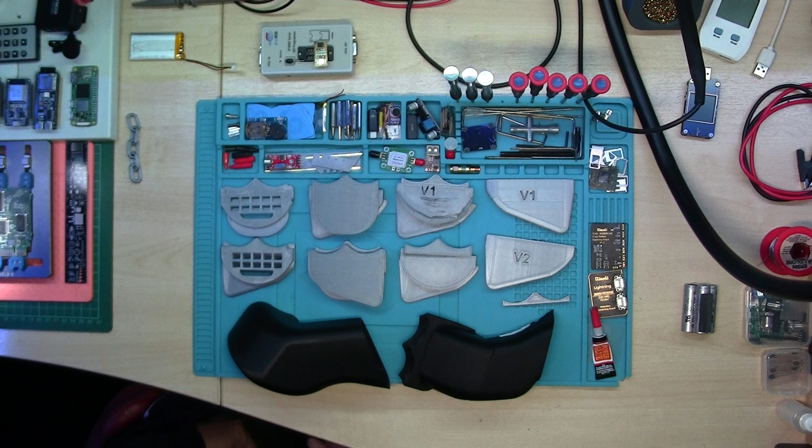Boom! We're back on the ram air ducts. I know, I expected to be finished in this video, but it don't look like it. Countless times I've printed and gone down there, tried it and come back up, and printed and gone down there and come back up. Mate, I should have bought a 3D scanner.

This isn't all of them, this is just a few. I've been no end that's not ended up going the way I wanted to. But yeah, I think you've seen these when I started printing in one of the videos. You may have seen that one, I don't know.

Trying to do a 3D object from pictures is just really, really hard. I watched Adam Savage trying to do guns out of movies and stuff like that, and even though he had reference pictures of the actual thing, it was just way off. So that's my excuse anyway.

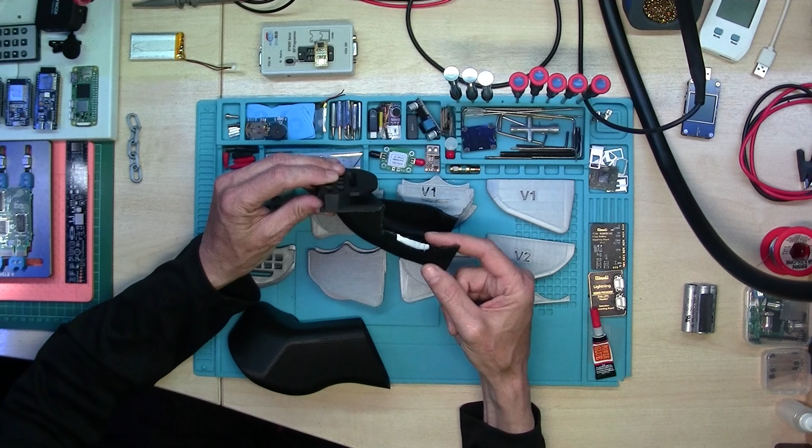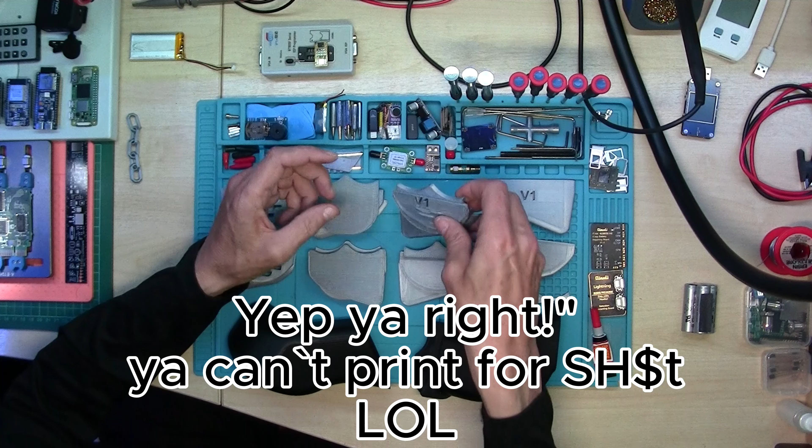I started with these, and then I've done that, done this, done that bit, then done the air duct. I've had to chop it massively to try and get it round where the fork is. Like I say, it looks a mess, an absolute mess. The print is terrible. But it was just to try to make sure that I got the right depth on things and it all locked into place.

Each one has a tweak to it, so whether it's a cut or a corner or it's shifted some way, form or another. If you put them up, there's not really a lot of difference. It's just subtle differences that I've had to do. I think that one fit. That was the first one that fit proper. This just here was off. But that's how it runs when you're trying to do things blind. You keep printing it, checking it, printing it, checking it, and so on.

This is ultimately the one that fits, and I've split it into two just to make it easier to print. And I've channeled it out and put vents in. I don't know if you can see that. If I bring it up, you can see the light come through. If you look at it flat, you can barely see through it. Let's bring it where the light is. Nah, you're not going to see it. But yeah, the light come through.

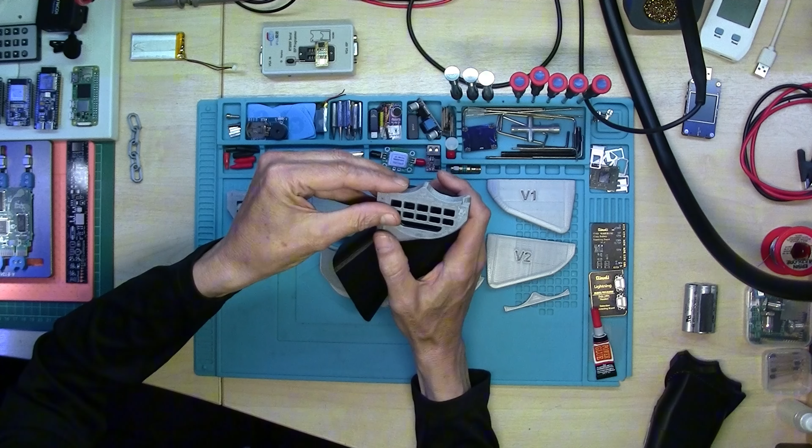If I hold that there and then get a torch, where's a torch? There we go. I don't know if you're going to be able to see this. So you get the gist. It's got the flow through. I'm wondering the amount of volume of air that'll suck in. What you've got to bear in mind as well is the mudguard is contoured like that right next to it. So all the air being forced around the mudguard will get shoved into that intake. So there'll be plenty of air going through there.

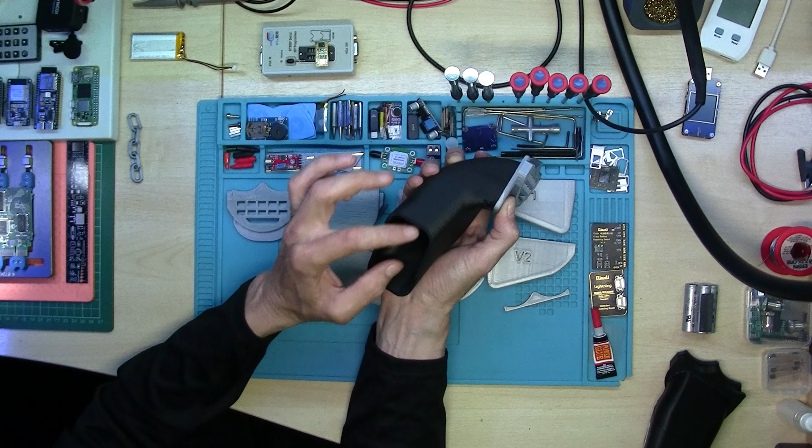And then we've got a big cutout there. There's no restriction in that pipe now. The only restriction that I think I've got is this. So I'm wondering, do I cut it all out the same as this?

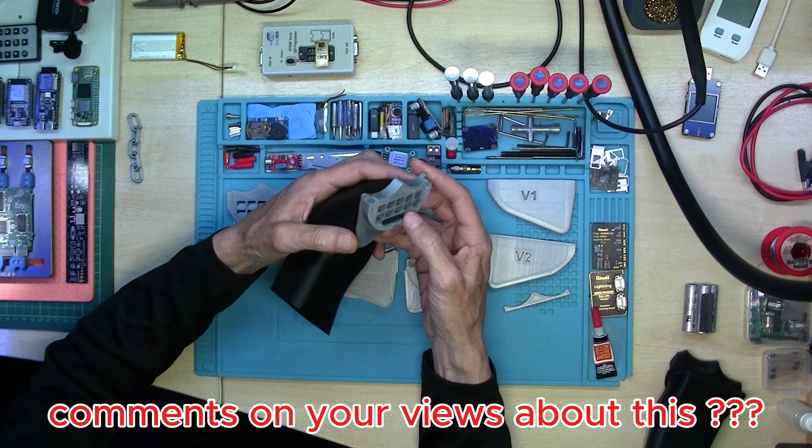But if I do that, air's just going to blow that way. You know what I mean? So air will come in the intake there and get forced around that bend and then just blow that way. Well, if it blows that way, it's just being blown into the centre of the wheel.

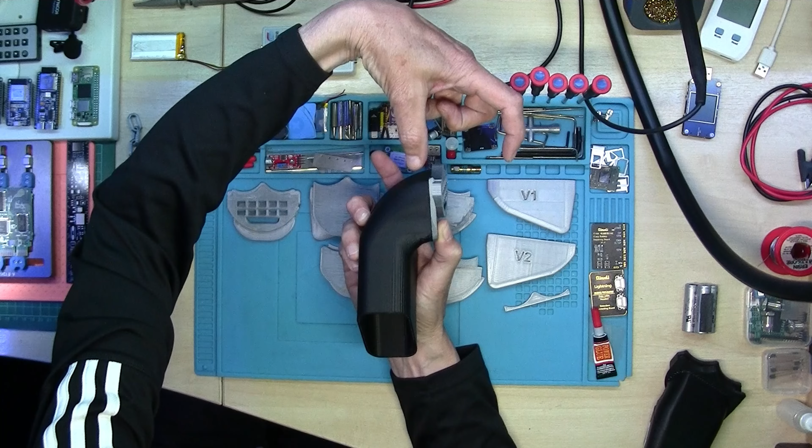I mean, the caliper's up here. You know what I mean? That's why I've channeled them air ducts inside this part to point up. I mean, the air will get pointing that way. You know what I mean? I mean, like I say, I'm just guessing. I ain't got a clue. You know what I mean? But yeah,

4 hours to print that. 4 hours. Jesus Christ. 4 hours. Yeah. But yeah, like I say, the front's changed angle.

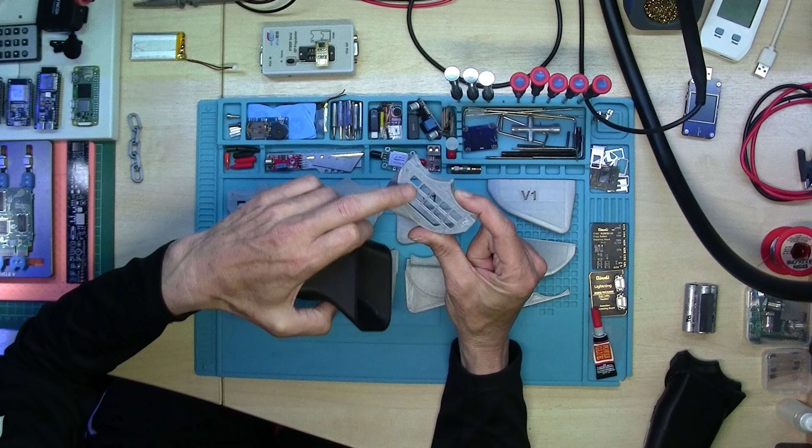And I've got a little trim that goes round the front that I was thinking to put some crosshatch things in to stop stones and whatnot. I mean, the stones ain't going to get by it with this. You know what I mean? But if I delete that and cut it out, then it's straight through. It's like a straight run. You know what I mean? So, I don't know. I mean, I'm guessing.

Yeah, so that's where we're up to. You know what I mean? I mean, that didn't print bad, I'd say. You know what I mean? And I printed it all in one, upright like that. Yeah, so all the overhang, I mean, there was a little bit of an issue just here. You know what I mean?

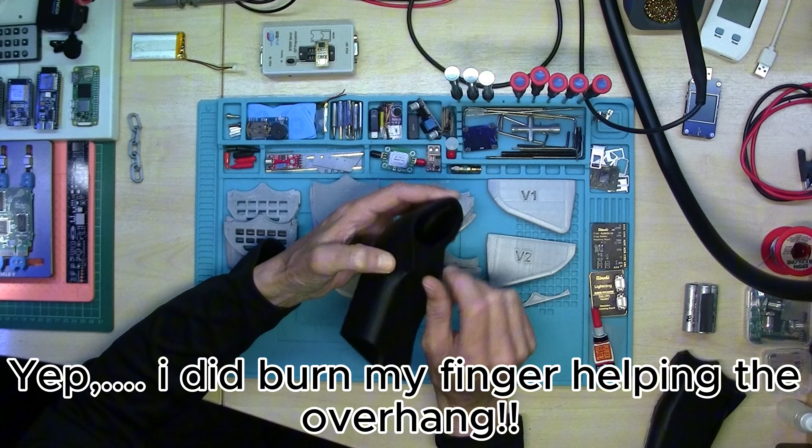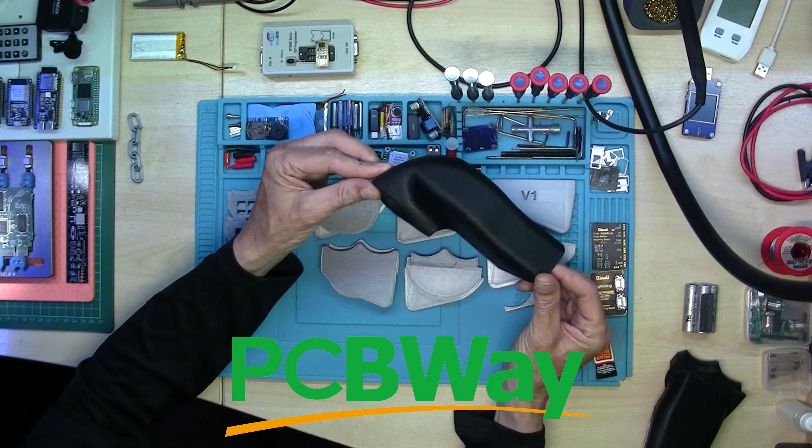But I mean, if I give the files away to whoever, my advice would probably be to get it printed professionally. You know what I mean? I mean, you can print it yourself. If you're happy with the finish of it, then yeah, it's not an issue.

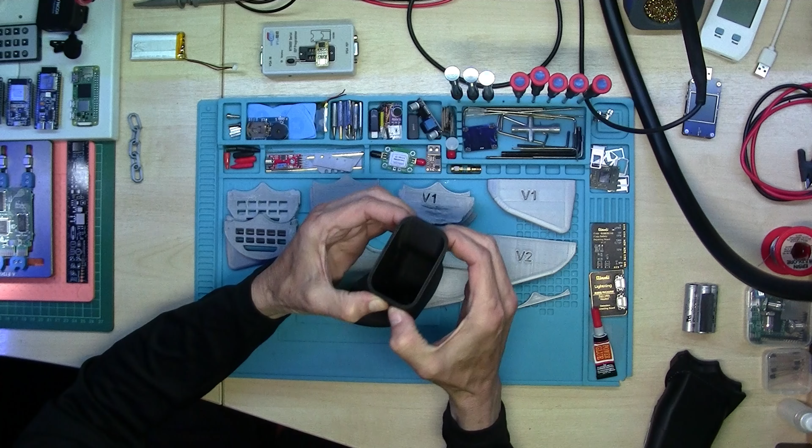One thing I would say is I'd print it with 100% infill as well. I ain't done it on this one because it's just a test piece, but if you look, that is proper flexible. You know what I mean? The top's solid, but the sides, yeah, proper flexible.

So I mean, a good smack will pull on that, and I reckon it'll break apart. I mean, it's only PLA as well. You might be better printing this in ABS. So,

and I think you're gonna have issues when it's all together and it's all one solid object or body. I think you're gonna have issues trying to print it because the amount of support you're gonna need is gonna be phenomenal. See, I'd print it like that, but like I say, you're gonna need to add support unless you split it in two or something like that.

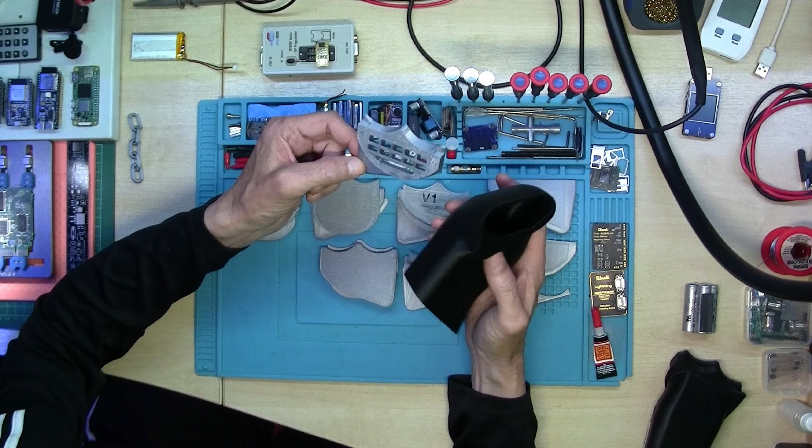Or I could always distribute the files in parts and then you glue it all together. You know what I mean? There's that option.

Yeah. I'm going to make quite a few different versions of this. So there's going to be some that's got the GoPro and Insta360 mounts. There'll be a number of different versions for different riding. And any that you want tailored to you, I can do. So yeah. But let's jump over to the computer and let's have a look at some of the pictures.

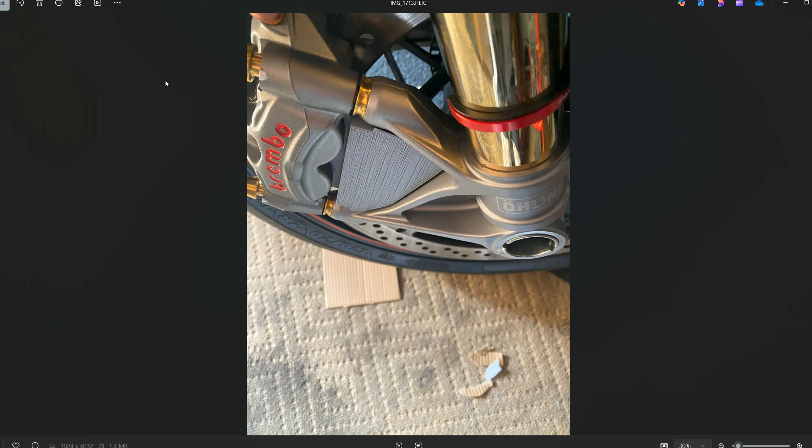Right, so here we are on the computer. I've took not a hell of a lot, but a few pictures of how I was getting on when I was going down there and trying them. So these are the earlier versions of it. Managed to get it to fit in that groove on the M50s. So it locks in there, and then you've got a flange either side, front and back of this Öhlins fork. So like I say, that plate is not going nowhere.

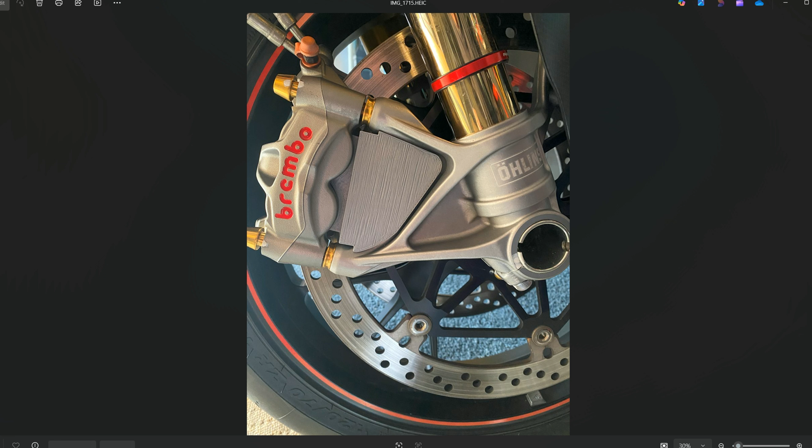What else we got? The thing that you don't get from pictures is from what I've printed to the top of that bit there on that fork, you have to go down and measure it, and then this side is practically nothing. Then you've got the radius of that bit of the fork there, and then you've got a miss there, because if anyone's got crash bobbins on the front forks, you want your duct to go over that so they can still fit the crash bobbins.

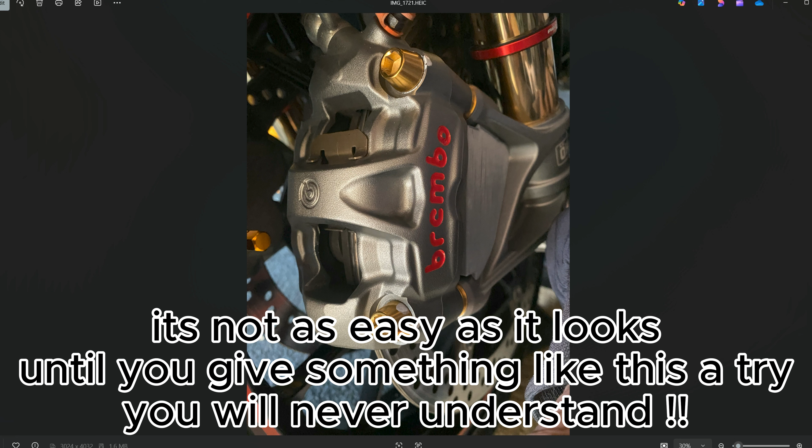Yeah, there's quite a few things that you've got to think about. But you see, look there. It's probably 3 or 4 mil there, whereas there it's probably 15, 20 mil. And it's really, really hard with pictures. Like I say, if you get a 3D scanner, you could probably do this in half the time I've done it in. You know what I mean?

But yeah, there's the vents. And then on the other side, as the air goes in there, it gets rammed up towards the pads and the discs. You know what I mean? I think this bottom row and that really long one at the bottom will blow it past the disc onto the other side. So it's kind of cooling both sides of the caliper, if you like.

Yeah, a bit closer view. Like I say, don't pay attention to the prints, they're just roughed out quick as hell. What else we got? Oh, that was the poor attempt at the first duct. Like I say, I just chopped out quite a bit. Well, chopped out this corner bit here because I knew it wouldn't fit, and then went down, and then the fork didn't fit there, so I had to chop that out. I mean, you can see where I've hacked it out.

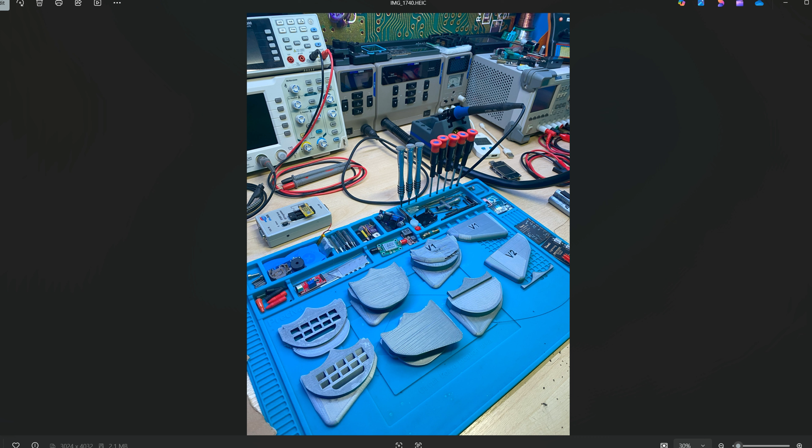And a load of pictures of the different versions I've printed out, or some of them. Now that's it on the bike. Which fit quite well. I mean, no issues. Like I say, I had to chop along that bottom there and along the top here where that radius is. And it's really, really low there. So you ain't going to get a crash bobbin on your front fork. So I had to redesign it.

But yeah, you can see where I've hacked it away with some snips. Made a right mess. But it was just to give me the depth so I could calculate how far off I needed to be. And same with the bottom. Bottom one's not as bad. But like I say, that's way too close for any crash bobbins. So I just scrapped this version, redid it, just went into Fusion and mocked up another couple, and then just picked the one I liked.

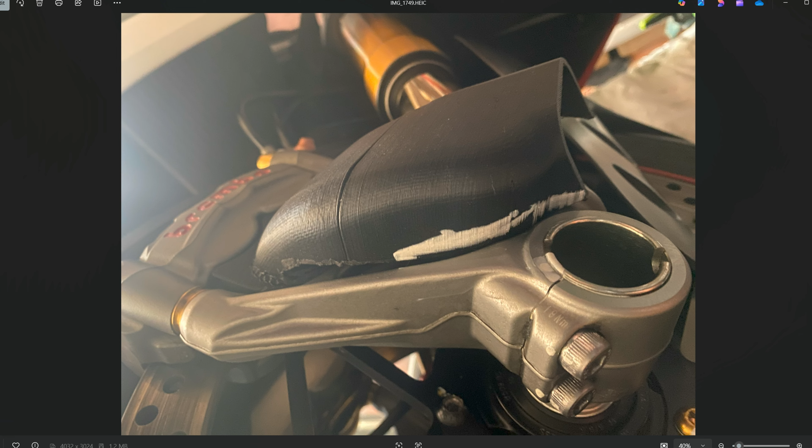Yeah, I mean, once that air duct there is joined to that plate, what I'll do is I'll bevel all that so it all blends in. But yeah, I mean, getting there. What else we got?

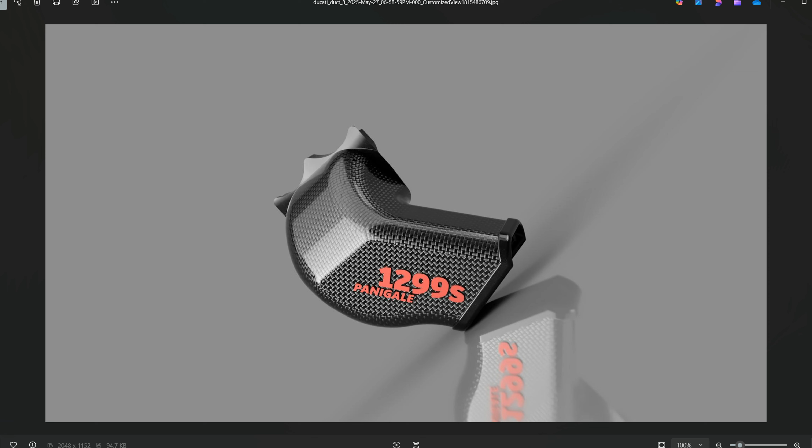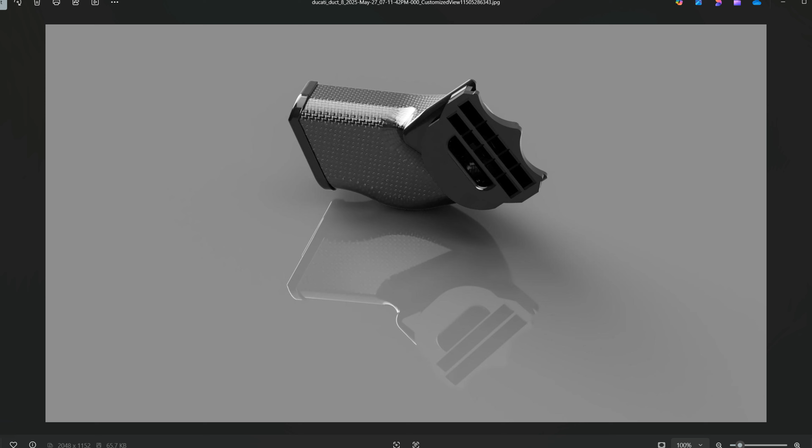This is where I'm up to now. So this is the revised duct that I've done. Now it misses the bit where the, let's see if we can get a better picture. Yeah, it misses the bit where the crash bobbins go. I'm not sure about this front. I might re-edit that, I don't know. But yeah, it's looking good. Like I say, I've only printed it tonight, so tomorrow, when I get time, I'll go down there and try it. See if it clears the forks and all the obstacles on the inside.

But yeah, there's the GoPro one. So I'll probably do a version with a GoPro mount on the top, and then a version with a GoPro mount on the side. Sorry, you know what I mean. And there'll be quite a few different versions. So whether you want the GoPro mounts or not, you'll still be able to print off whichever version you want.

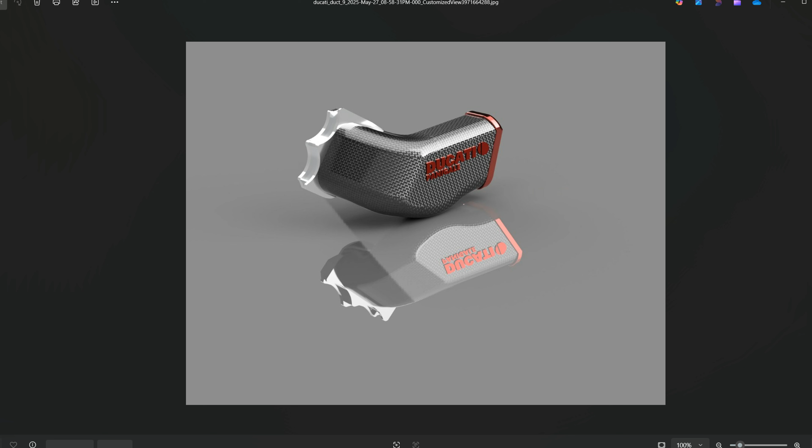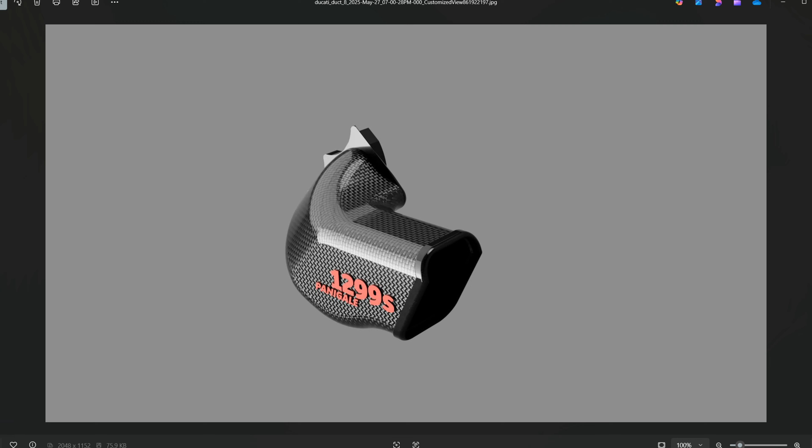Same with the text with the writing on it. Where we at? So you got Ducati Panigale and then 1299S. I'll do it 1199, 1199 V4, or just Panigale, or whatever you want. Or just Ducati. So we'll just have to see how it goes. I might have to redesign this totally. Might not fit. I don't know. But we'll see tomorrow. And yeah, we'll go from there.

I'm wondering as well if anyone's got any comments. Should I grid this front to stop stones or whatever else, or should I just leave it open? You know what I mean?

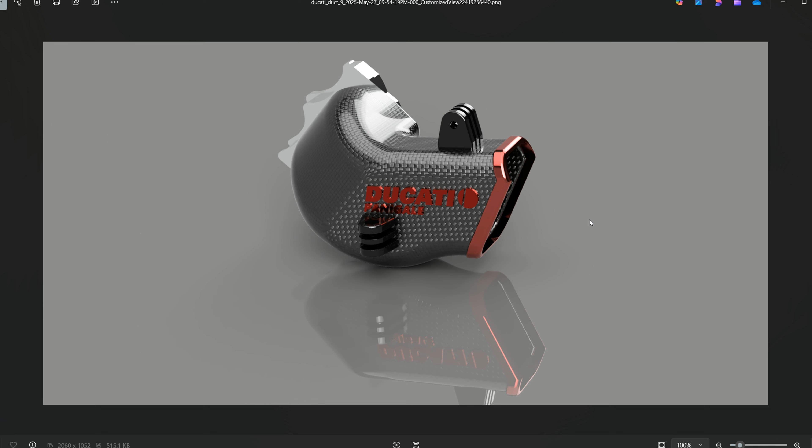So yeah, guys, quick video. The next one is really going to be the last one. I'm only doing one more. This is dragging on forever. I've spent countless days and hours on CAD and printing. So yeah, how far do you go? Do you just keep going and going, or do you just mock it up and print it off and get it to fit and away you go? As long as I'm happy with it myself, that's all that matters.

So, like I say, we'll wait and see tomorrow. I'll fit that and see if it fits, and if it doesn't, I'll tweak it a little bit and then try again. But yeah, anyway, this is just a quick update, and I'll probably do one more final video with it all printed out and fitted to my bike.